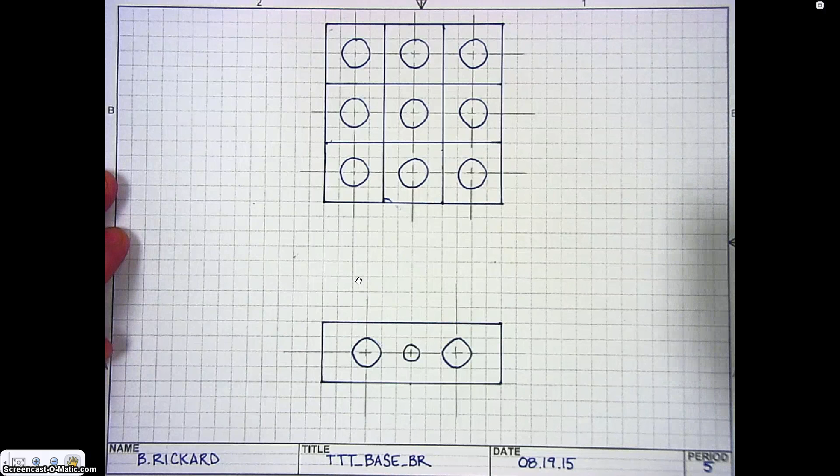Okay, we're going to walk you through how to dimension the base of the tic-tac-toe project. So again, the first dimensions we're going to put in are width dimensions. They run from left to right when looking at the front view. So I'm going to start here on the left and I'm going to draw an extension line.

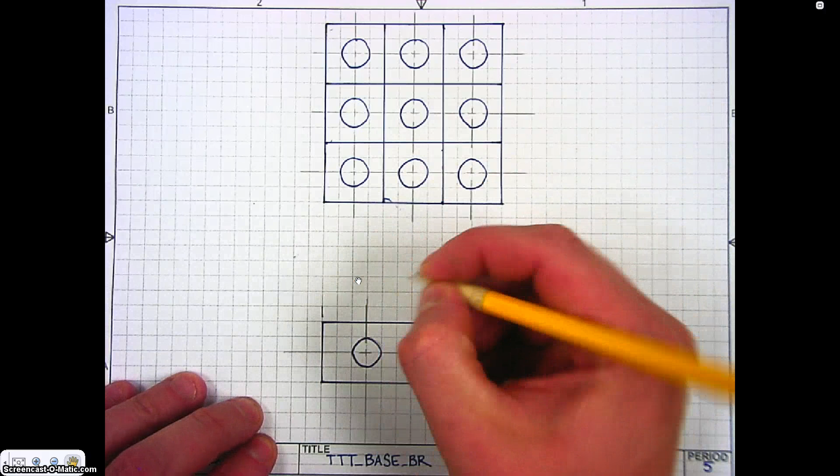The first thing that we need to dimension is the location of this first hole. And so that dimension is 0.75. So I'll write that in. I'm going to go ahead and put my dimension lines on the outside of the extension lines so they fit better. The next thing we need to dimension is to the center of this next hole.

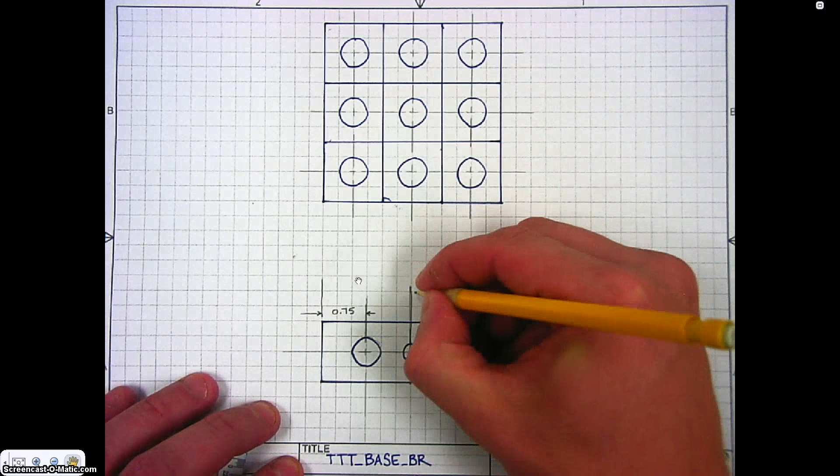So I'll draw an extension line up. If you need to use a straight edge, make sure you do that. Keep it nice and neat. Draw this extension line up. Write in my dimension. It's 1.5 inches. Draw in my dimension line, making sure that the arrows touch the extension line.

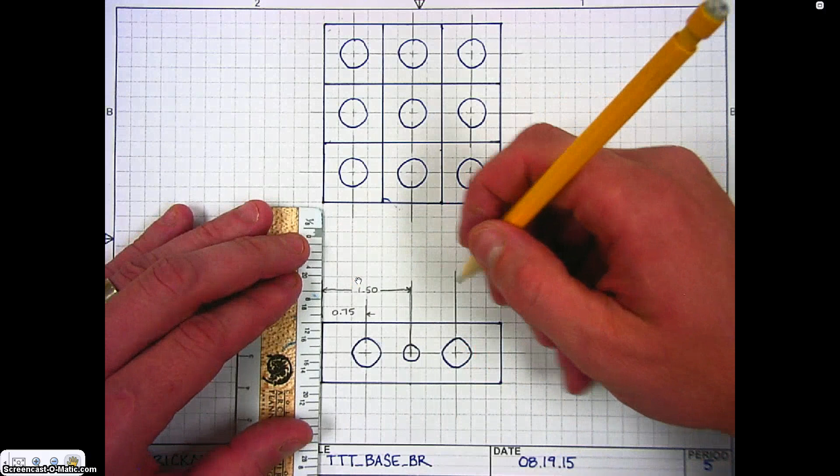This one, the next center of the opposite hole. Draw an extension line up. I will write in the dimension 2.25. Put in my dimension line using a straight edge to keep them nice and neat. So that locates all the holes.

The next thing we need to do is put in a dimension for the overall width of the object. I'm going to do that on this side down here. So I'll draw my extension lines down. Write in my dimension 3.00. Draw my dimension lines. So we have the width dimensions taken care of.

The next thing we need to do are the height dimensions. Height dimensions run from bottom to top in the front view here. Put an extension line in there. We need to locate the center of that hole. And so it is 0.5 inches high. So put that in. 0.50. And I will draw my dimension lines on the outside of the extension lines in that case because they don't fit in here very well.

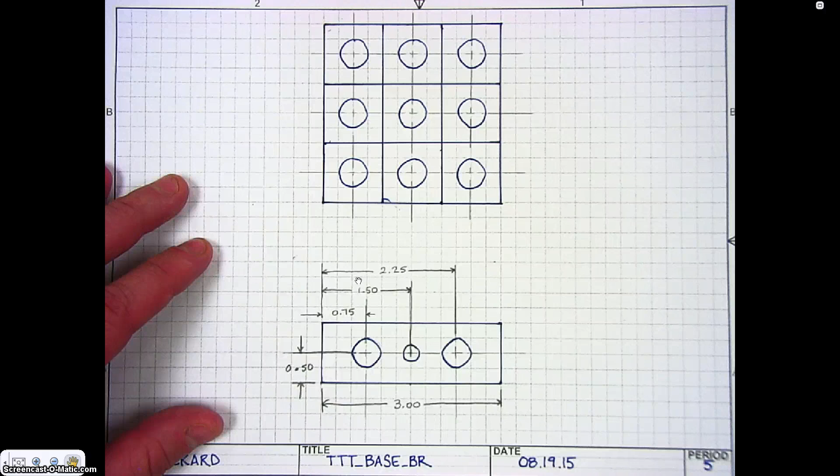The next thing I need is the overall height of the object. I'm going to do that one on the other side. And it is 1.00 inches high. So I drew my extension lines out. Draw in my dimension line. And that takes care of the height dimensions.

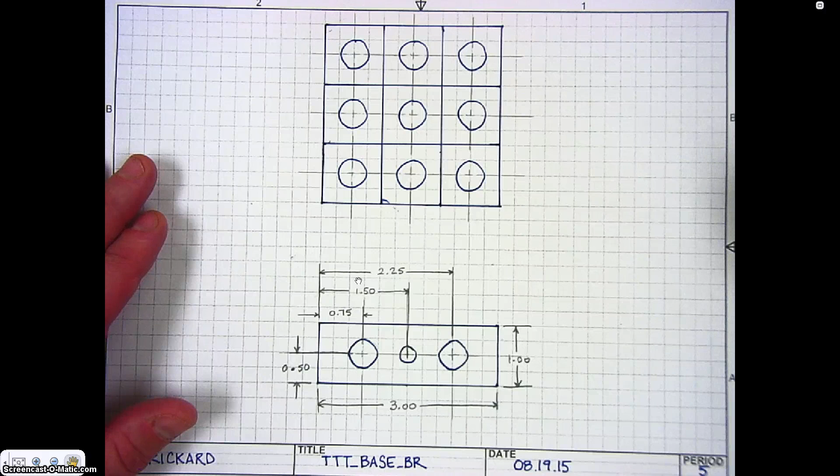The next thing we need to do are the depth dimensions. So a couple of depth dimensions we need to do. In the top view here, depth dimensions run from bottom to top. And so the first one we need to do is to locate the center of these holes. So I'll draw an extension line out. Use my center line as the extension line to locate the hole. It is 0.50.

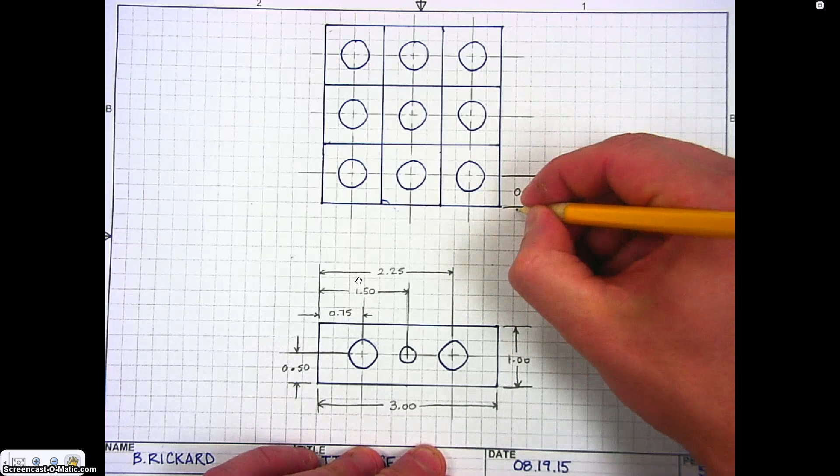I'll draw my dimension line on that, and then instead of dimensioning all of these circles, we can put in an annotation, and I'm going to put in TYP. That annotation means typical, so it means all of those holes are spaced evenly. They're all the same dimension.

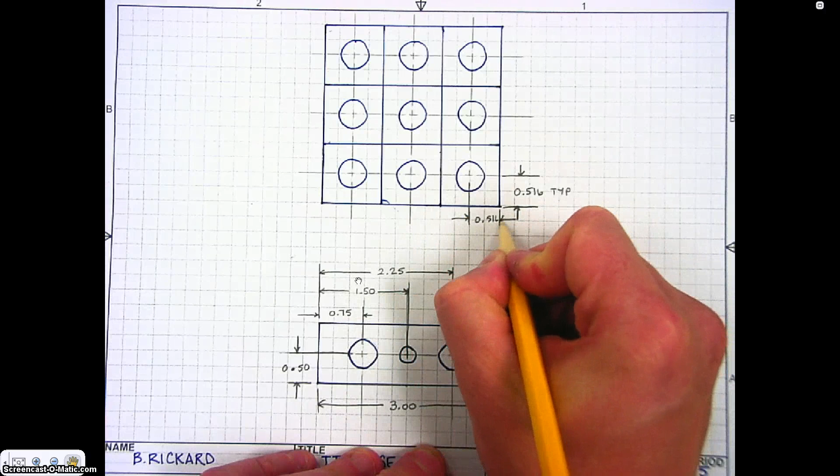So I can do the other thing right here to locate the width for the holes in the top. It's the same dimension, 0.516. Put in my extension lines, and then that's a typical dimension too, so I'll write in TYP.

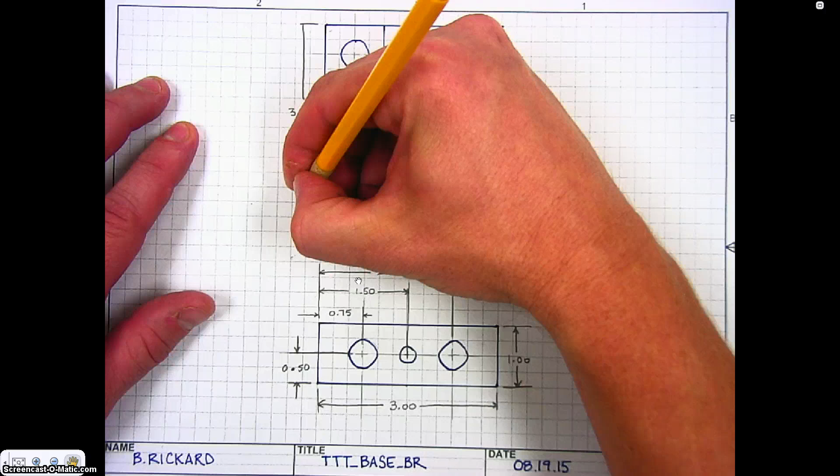The last thing we need to do is the overall depth of the object. So I'm going to do that over here. Put my extension line in. Write in my dimension, it's 3.00. Draw in my dimension line. One thing that I want you to notice is that all the dimensions you can read from the bottom of the page. Alright? And so if we were to write the dimension like this, that would be incorrect for what we're doing. And so we want to be able to read the dimensions from the bottom of the page.

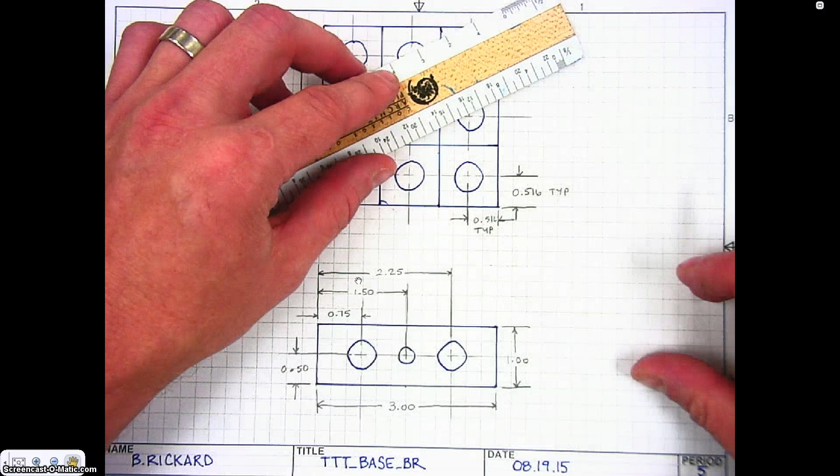A couple of things we have left to do. We want to dimension these holes in the top. So I'm going to draw a leader line out from one of the holes. Like that. It's going to be a typical dimension because we're just going to dimension it once. We're not going to dimension all of them. So I'm going to write TYP. Then I'm going to give the diameter of the hole. The diameter is 0.5.

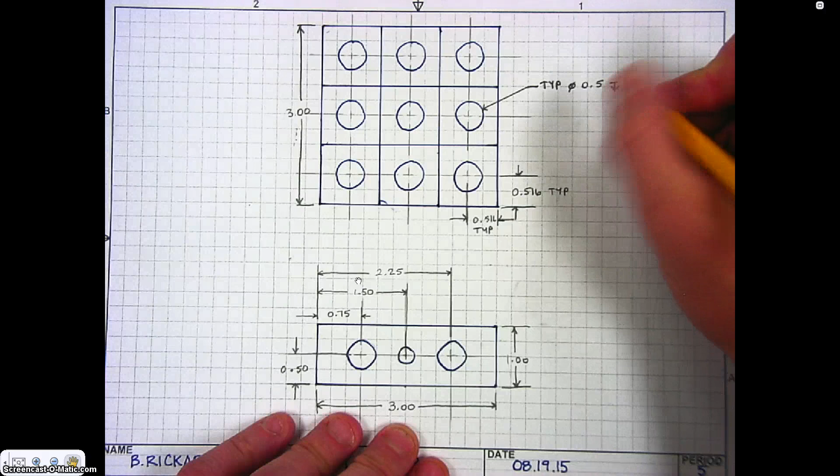Then I'm going to give the depth of that hole. So this T with an arrow at the bottom is the symbol for depth. That is telling us how far down does the hole go. And it goes down 1/1000th of an inch. So I'm going to say 0.001 for that. The last thing we need to do is dimension these two.

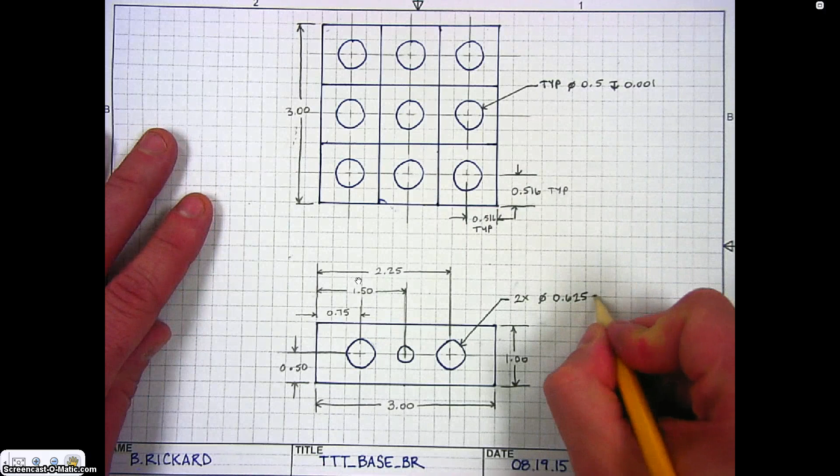So I'm going to draw a leader line for this hole. And in this case, instead of writing TYP, since there's only two of them, I'm going to write 2x, and that means that the hole happens 2 times. Then I'm going to give the diameter of the hole. The diameter is 0.625. And then the depth of the hole, again the T with the arrow at the bottom of it, is 2.5 inches. Takes care of that one.

One more annotation we have to do right here. So I'll draw another leader line up. Draw an extension line. This hole is a tapped hole. So the annotation for that is 1/4. It's a 1/4 inch hole. It has 20 threads per inch, so I'll put 20. It's a unified coarse thread, so I'll put UNC.

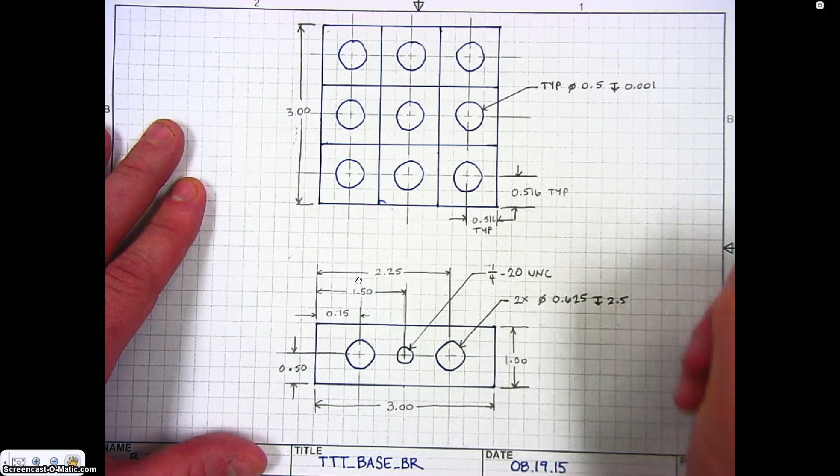It's a class 2B fit, so I'll put 2B for fit, and then I will put a depth of 1 inch. Alright. And that takes care of all of the dimensioning you would need to do to create that base part for the tic-tac-toe project.